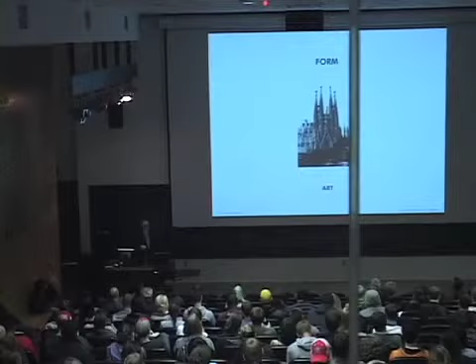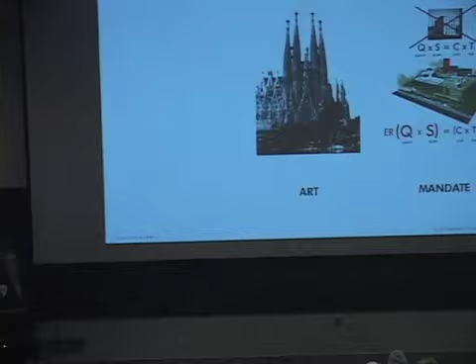And we certainly, like all of you in the room, live to make beautiful form. That's the first obligation of the architect, is to make buildings of desire on the part of our clients and those who encounter them. But increasingly today, we find that we are operating under a new mandate, and it literally is a mandate. It's one we experience daily in the course of our existence as architects. It's one our clients actually place upon us and thrust upon us, whether we want to do it or not. In our case, we openly embrace it.

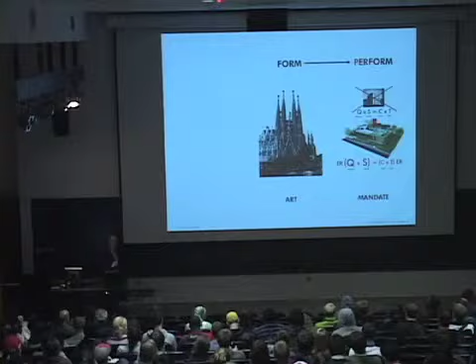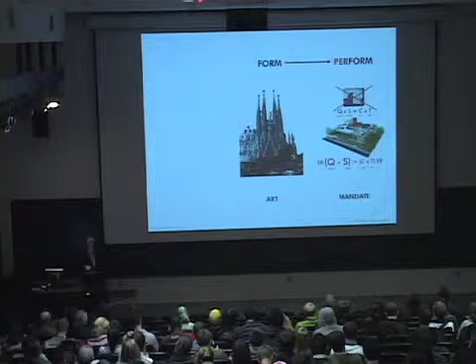Many are drawn kicking and screaming to the table on it, but it's quite simply this, that there are really two huge underlying problems in our profession today: productivity and the environment. James and I believe that they are intimately related problems and can be better solved when fused together than they can be singly. You'll see in just a moment some of the underlying reasons why these are so important.

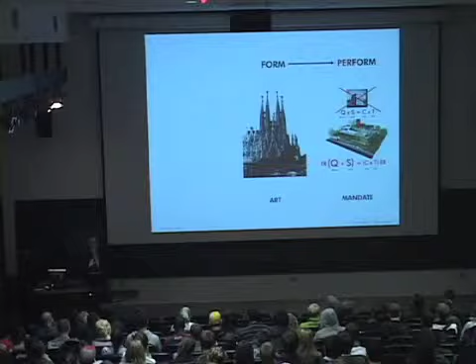But they have thrust upon us a demand for performance that goes beyond the artistic quality and appeal of our form making. And that is a reality that we are being held to today, is how we're going to improve the quality and scope of what we do in less time and for less money, and enhance the environmental and ethical performance of our buildings in terms of their management of energy and resources.

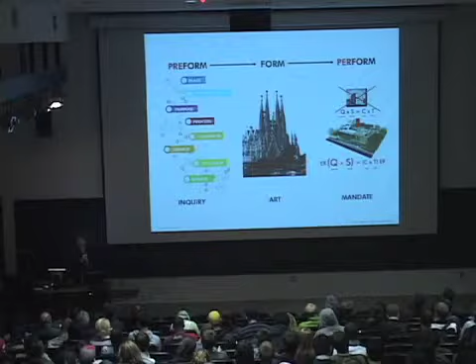To get to this mandate, we've had to restructure our firm over the last decade plus around a whole realm of inquiry, because you can't get to performance without articulating really precise and important and difficult questions that need to be answered in order to inform your design, so at the end of the day it can actually perform.

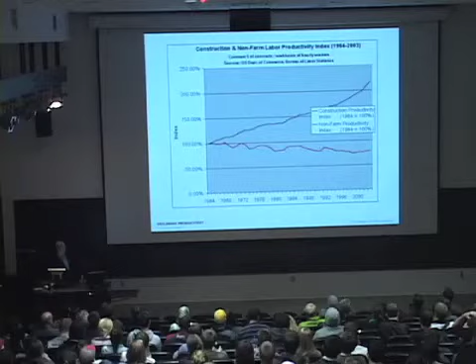At the same time, we in the construction industry and the design professions, architectural and engineering and other design professions are part of it, have actually declined by a good 20%. And that's a pretty remarkable and depressing swing. And our clients have really been telling us for a number of years, we're not going to put up with it. We're not going forward this way.

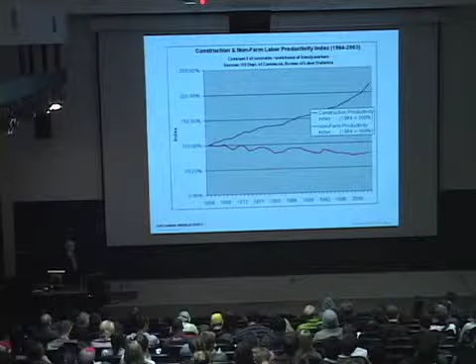And it's frankly been responsible for the decline in the quality and the craft of our buildings, because they have gotten so expensive and delivered so little that the budgets erode, and we wind up with craftless and soulless buildings almost by default because of our decision as a profession, in essence, to really not address this.

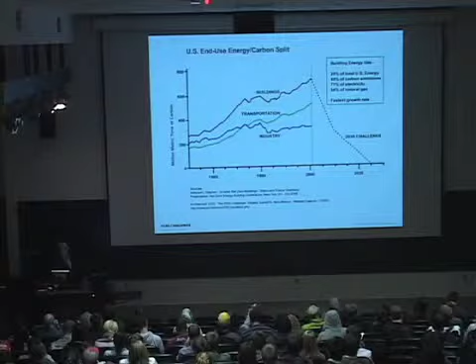And then secondly, at the same time, we're confronting an extraordinary revolution, literally, in the importance of the environment. And you can see that buildings, again, which are a huge part of the energy use of our nation and of the world at large, are again climbing in their energy use at a steeper rate than transportation and industry are. Industry's almost flattened. We're continuing to climb.

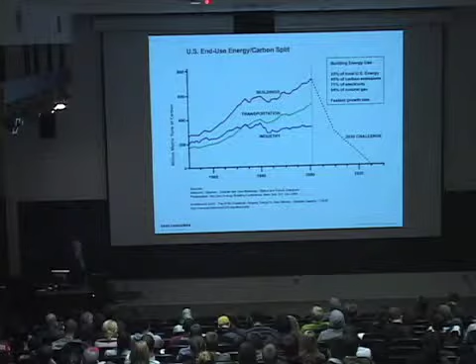Another huge challenge that, again, whether we want it or not, it's thrust upon us. There are mandates out there that government and clients are placing on us. If we don't want to meet them, we have no choice. We literally have to. So the structure of our firm really stopped being focused on planning and doing things solely, but started looking at how to monitor and learn from what we had done so we could improve upon the past and enhance our productivity and our environmental performance.

the same old thing, while the world we're trying to build in gets more complex and our productivity declines and our environmental performance declines. So the structure of our firm has at its core what we call a research kernel. It's a group of staff. There are now 7, and we have an 8th that's being added as I speak, who support everybody in the firm and drive the practice of the firm.

Some are architects with a research bias. Others are environmental scientists. Others are mechanical engineers. There's a variety of skills that they bring to the table that aren't necessarily the skills that we have. But that's what sits at the center of our practice. We research across 4 realms: processes, systems, the environment, and materials science.

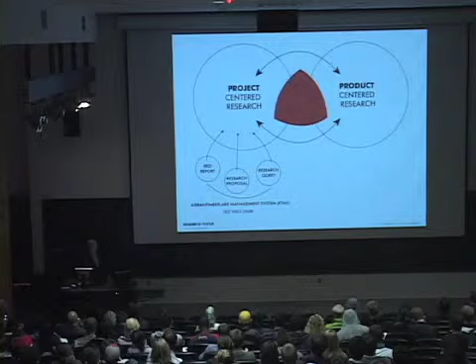Early on, when we first started the research group, one of the first tasks James and I undertook to address the productivity question and the environmental question was look at other industries that made complex things. So we toured the world, literally, and crisscrossed the U.S. The only place we went here in Ohio, I think, was Toledo to a Jeep assembly plant there. But we looked at how the aircraft, shipbuilding and automotive industries were making very complex products and, in some cases, large products as well, to see how they were doing it.

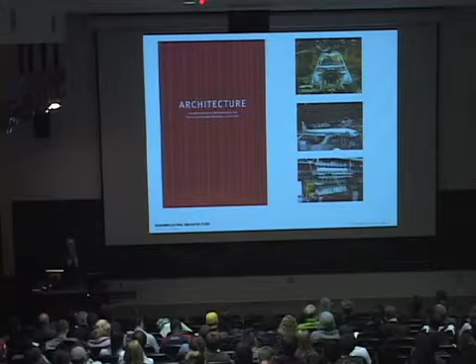And that became part and parcel of ultimately our book, Refabricating Architecture, which still drives our firm's approach to the questions of productivity and the environment. And simply put, when we went around and toured all these industries, this is what we found their new paradigm was, that they were providing more quality and scope in their products out of all proportion to the cost and time required to produce them.

And they were starting to do so in an environmentally ethical way that accounted for materials and energy use and enhanced them. And that was the paradigm that the major corporations that build these large products were operating under, but it was not the paradigm we in our industry are operating under.

So for us, the gist of it is that this is a new paradigm, and we have to add to this, of course, the obligation I began with, which is form. It's still got to be artistically extraordinary and beautiful and compelling and become an architecture of desire in the end.

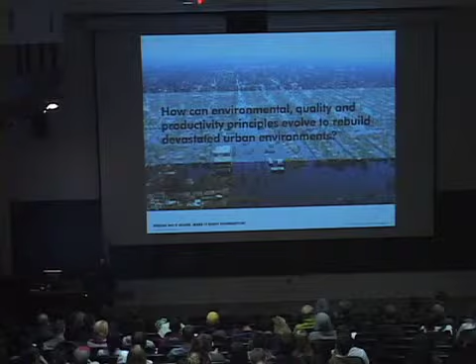So I'm going to share with you several projects in the time we have together this evening to show you how we use this realm of inquiry to form our projects. And it is our firm belief that the more we engage in and exercise and accept these constraints, the more they help us edit our buildings, make them more formally potent and simple and beautiful and elegant. So we in no way believe that these performative constraints do anything except help us make more

elementally beautiful architecture. So after Hurricane Katrina, we were given the opportunity to build what's now called the Special Number 9 House for Brad Pitt's Make It Right Foundation. And we undertook an approach here that was different than the rest of the architects that have been participating in this, and it had to do with jobs as well.

Part of the objective was to look at the productivity problem, utilize some of what we had come to learn about off-site construction strategies, and try and develop a mass customizable system of parts that could be built in New Orleans, providing jobs that after the city is rebuilt could be an export industry for the city. So we looked at common components. We looked at variable components as part of our mass customization strategy.

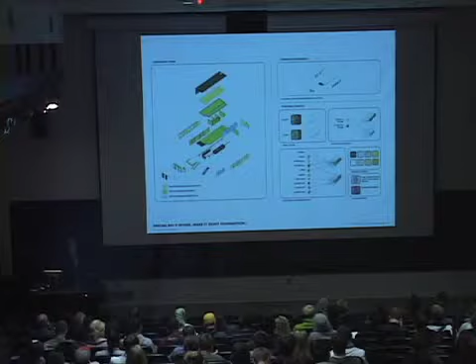There are two different roof strategies here. And then there are a series of interchangeable cartridges off of these common elements that are common to every house that an individual homeowner could select. So this was a system to design a house from a collection of parts with some capacity for both standardization of the chassis, but also mass customization of the outcome on the part of an individual homeowner.

Make It Right has been relentless in their monitoring of their performance and learning from it. And in the course of about 3 years now, they have driven the price of their first homes, which were roughly $220 to $230 a square foot, down to about $120 to $130 a square foot. They rigorously investigate building systems. There's quite a lot of off-site assembly in this that they've evolved into, and they're getting better because they monitor and learn as a client.

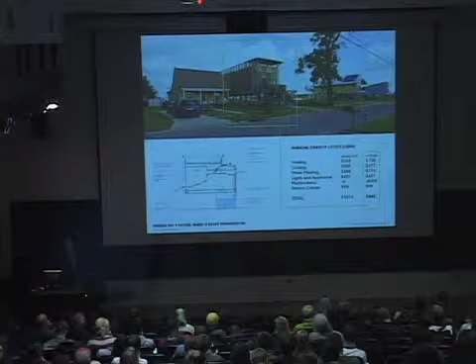At the same time that they are improving their productivity, doing more for less, their houses perform. This dwelling was designed with original simulated costs for a house of comparable size in New Orleans of about $1,670 worth of energy per year for all these systems. The actual monitored performance is $1,000 less than that. That's real money in the pocket of a homeowner who doesn't have much. It's a homeowner who actually generates more electricity than she uses, so she's selling electricity as part of her income. A real positive environmental and productivity outcome for our profession.

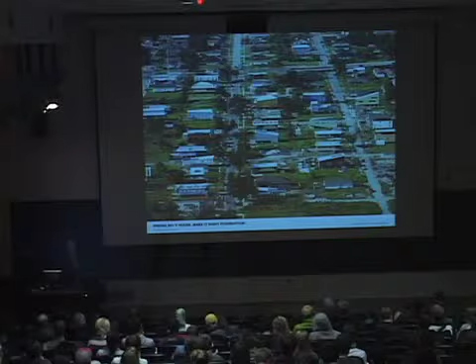It's becoming a community. The Make It Right Foundation's work in the lower 9th Ward is now the largest community of LEED Platinum homes in the U.S. And the outcome, we believe, are houses of real desire. These people really love these houses. They love being in them. They love the quality of the light in them. The owner of this particular dwelling said to us when it opened, I used to watch TV all the time. I hardly ever turn it on anymore. There's so much light in this house. I just want to go outside.

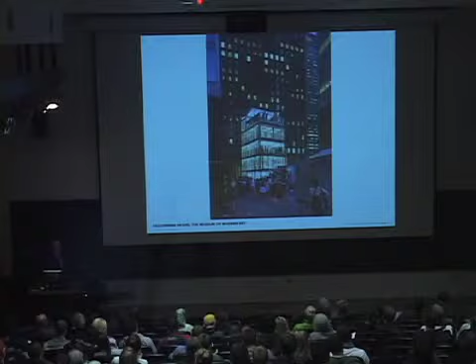A second exercise that I want to share with you this evening is the Cellophane House that we developed for the Museum of Modern Art's exhibit in 2008 that they actually put up in a lot next to the museum in New York. It was basically about prefabricated and off-site fabricated dwelling. It's called Home Delivery. This is a view of Cellophane House on opening night with Saarinen's CBS building in the background. And part of what we set out to do here was answer that question on my original slide about management of carbon in the building.

It's a very, very complex building with lots of initiatives, but I'm going to just focus on this one particular initiative with you this evening. We don't know as architects how much carbon is in our buildings. We just don't count it. Buckminster Fuller used to always marvel at the fact that we didn't know how much our buildings weigh. It's far more marvelous that we don't know how much carbon is in them.

And we don't, as a profession, again, ethically assume the responsibility for managing carbon because we don't even have a clue about how much we're designing with when we're designing. So we're designing a lot of products and methods to manage that. And it's critically important for this simple reason.

We can focus all we want on operational energy that goes into our building, but when we put a building up, in the case of the two houses I just showed you, there's enough embodied energy already in those houses to equal 40 years worth of operational energy. So we're basically leaving a huge portion of the total energy on the table, literally. And it's frankly unethical for our profession to go forward thinking we cannot understand what we're doing when we're designing a building in terms of carbon in the materials we're using.

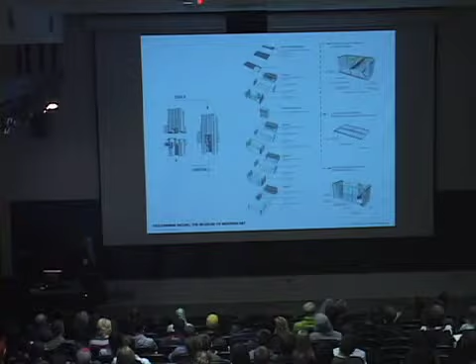So this is a dwelling that had to go up in just a couple of weeks. So it has three components to it, a stair, and these are more modular. It has an internal floor plate in the center of the building, and it has the front wall of the house. And these are the pieces and how they stack from the bottom to the top. And this is the fundamental architecture of the building. It's this joint, very, very elegant joint that was developed to be quick coupled together to enable this fast couple of week-long construction process, and it had to be uncoupled equally swiftly.

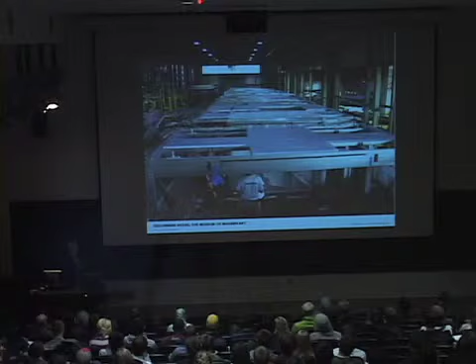So here it is being put together in a plant in Lebanon, New Jersey, Kullman Industries, Kullman Buildings Corp. And here it is going up. What you see here was a week's worth of work, and we had a little more than 2 to finish off the entire dwelling. So it was all basically craned into position. It similarly had to come down in a similarly swift time at the end of the day.

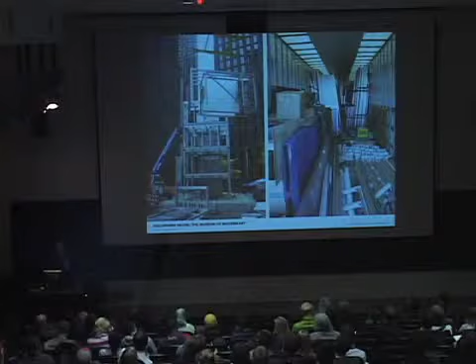So on the left, you can see the house being disassembled, the joints that stack together and join, unstack, and allow the dwelling to be taken apart. And those modules were laid on the ground, then disassembled. Every single part is labeled with a code on it, and they were stacked into trucks and taken away. So it was designed for disassembly. Now, why is this important?

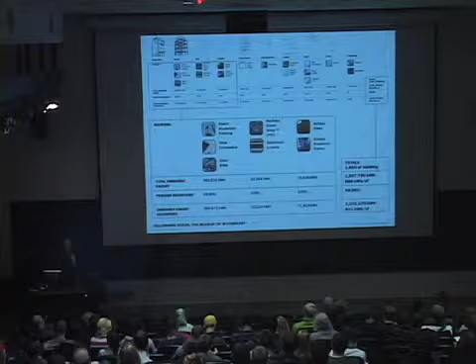We believe in our practice that it's an ethical responsibility to start to look at the life cycle of a building and design for the long-term management of the energy that went into the building so we don't have to pulverize it. Recycling only reclaims a small portion of our buildings. Designing them for disassembly can reclaim more. The products can be used in other industries. The scaffolding on Cellophane House, we've sold some of the extra scaffolding to industry that uses it for machine works and machine enclosures.

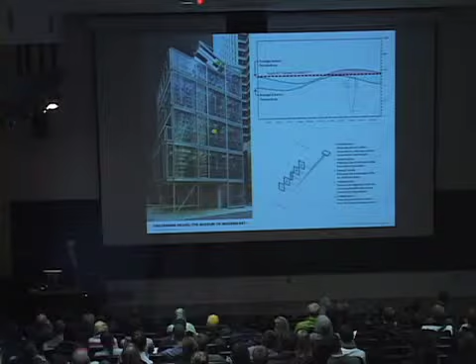It's got integrated shading films that let in the type of light we do want and keep out the radiant wavelengths that we don't want. It has integrated photovoltaics on the skin of it to generate the energy to use the building. And it's part of an ongoing exploration in our firm of a wall cladding product we call SmartWrap that began in 2003 in a Cooper Hewitt design exhibition.

And again, the outcome of these constraints is beauty, we think, and objects that glow, places that people want to go into. When they came onto the site at the museum, this was the object people gravitated toward. So these constraints don't restrain us. They actually provoke us forward in terms of the desire and the beauty of the buildings. It comes out of the constraints. The more constraints we have, the better. The more we have to work against, the more artful our buildings are going to be.

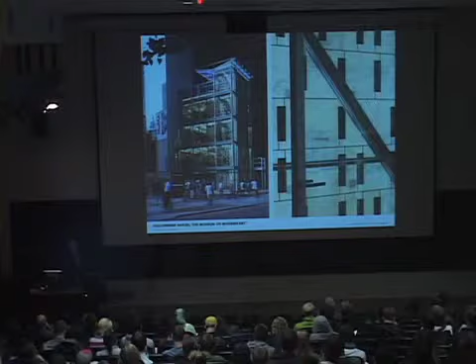Shifting gears from houses, and by the way, on the houses, we pretty much only do houses when we can make entire experiments out of them in terms of how we change and address these productivity and environmental problems.

So the larger buildings are more focused in that regard, but we are working in institutional building contexts to try and use some of the same principles as well. I'm going to share three buildings with you that have just been completed, so they're not published. They're not in the book that Mike held up this evening because they've just been finished this fall.

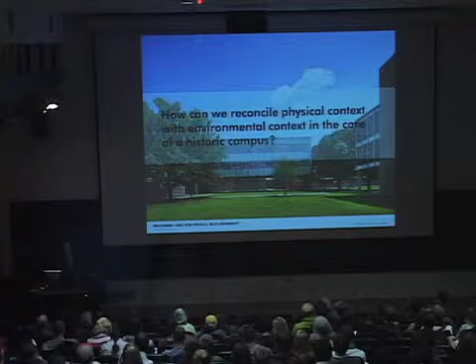The first is a new physics building at Rice. For those of you that know the campus, it's a pretty extraordinary Ralph Adams Cram designed campus. The core of the campus, the main axis, is here with a lot of the Cram buildings, the old architecture school lining that edge. The site for this building is in the engineering quadrangle. It sits squarely in the middle of that quadrangle amongst a series of largely 1960s era, but somewhat earlier era buildings, and a couple of postmodern buildings like this one in here. So very much hemmed in within a tight historic context.

They originally thought they wanted to move the building out to another sector of the campus, the way most research labs are moved today, but we were able to convince them to stay in the core. And the plan is quite simple. It's a double bar building. There's a bar of laboratory spaces here and a bar of office spaces above this landscape here. So the ground plane out here is open with a building above. And there's a passageway through the middle this way and another passageway bifurcating the building here.

It sits, we think, really well within the aesthetic context of the campus, but it's fundamentally performative at the same time. We do lots and lots of work over the specifics of orientation, down to horizontally rotated and vertically rotated building volumes, to completely understand, before we start designing, the environmental performance of a building, how much energy is falling on it. We model them across time throughout the year to understand that, look at the totalities of it, and then start to engage in designs for which that is part of generating the form of the building,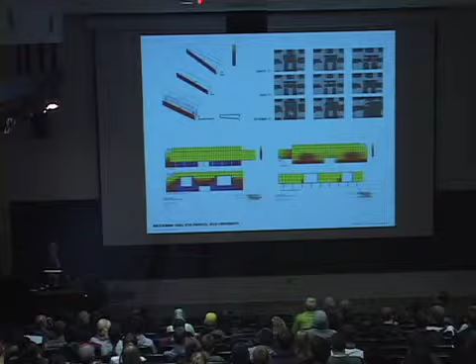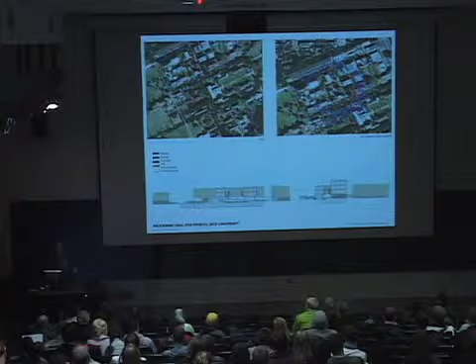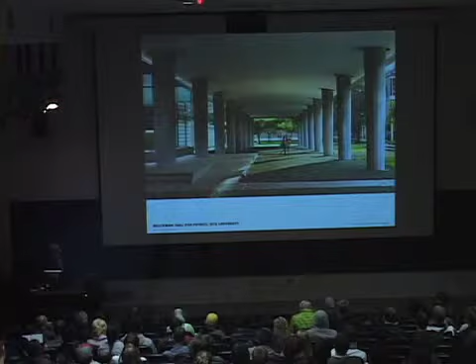So there was a detailed, very expansive survey of the site, including some wind modeling testing, some physical modeling on the site, as well as computer modeling. And again, all the design ideas were tested against those models for performance. And the outcome includes this shaded undercover area along the front flank of the building with the office wing above it, and with an open light well in the middle that provides ample and abundant daylight for all the offices in the building that face out into this well.

And the well is a device that shades direct solar penetration into these spaces and allows for that degree of daylight to penetrate into the core of this very large building. Use of a water feature to help provide some cooling in the outdoor space here. And all of it very much consistent with the context in which it occurs. You can see some of these engineering buildings in the background from the 60s. This building sits well within the campus. The main entry and stair is located on the cross passage of the building. And again, this passage is sited for wind penetration through an adjoining courtyard complex. So very much part of our design thinking throughout is constant testing of the building.

So basically the idea was to take the laboratory wing that did not want nor could it use much daylight and was a much larger volume, place it to the south so it screened direct solar penetration and allowed mostly penetration of light into this interior courtyard. And then on the north flank, we were able to open all the offices of the building up. So it's just good, sensible design based on a knowledge of the actual micro-performance of a site so that we don't create problems that require us to use extra energy to resolve the problems through machinery. Really, really simple, fundamental underlying set of premises, very, very difficult to actually put into play, though.

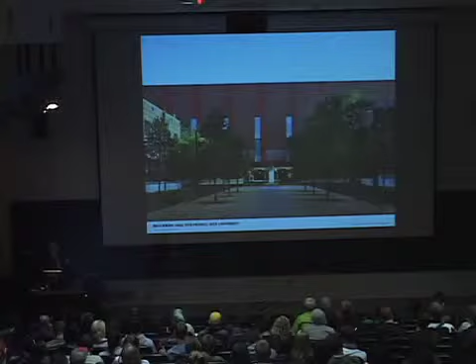Pretty remarkable for a building that cannot have natural ventilation in it. So this is the screen that more or less sets up the whole promenade and procession from the core of the campus out to the building here.

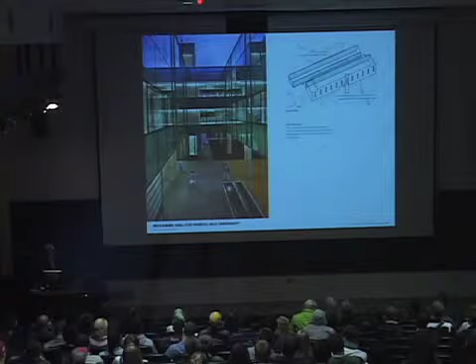And you penetrate through into the interior, and this is where we've been able to really introduce the daylighting in these spaces, ringed by offices with classrooms and seminar rooms and meeting spaces in the connecting links in between these two wings, and a view of the complex as a whole with the classroom wing here, also lined with classrooms on the north facade of the main laboratory block here.

At the same time, organizationally, we always ask social questions and have social inquiries about how the building might best be programmed to bring people together and engender collaboration. And in this case, it came together with environmental concerns, as it always should. All of the laboratories are over here across the top flank of the building, and they are able to be entirely flexible, which I'll show you in a moment, because they have similar mechanical requirements.

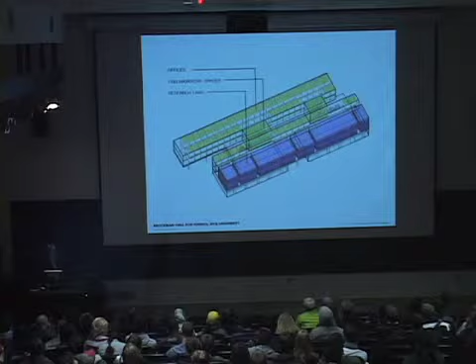So this is a completely different building in a way, with different mechanical systems designed for long-term flexibility of laboratory use. Similarly, this is an office block over here, designed with different mechanical needs altogether, different environmental needs altogether, and also designed for complete flexibility over time. And they're interlocked by these common spaces, these collaborative spaces in the middle that draw people from both sides, from the office and labs out into these collaborative spaces.

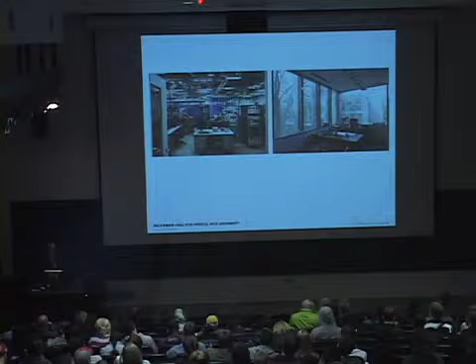So this is pretty typical of what the labs in the building look like, and they're changing daily. So it was an armature and an infrastructure to allow change. Physicists build all the time. They're rebuilding their environments every day. So that module allows them to do whatever they need and want to do in it. The offices will change less regularly, but they can easily be combined into suites. And so this building is designed for long-term flexibility that minimizes new construction, new materials, new embodied energy in the building, and optimizes the capacity of those that use the building to make environments that they need to be productive.

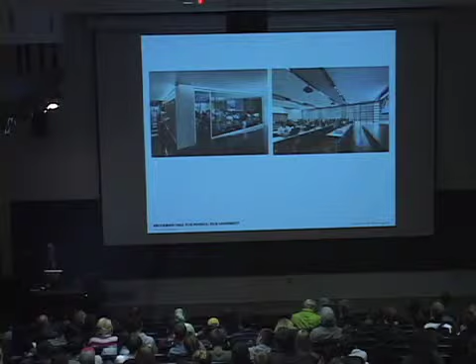And then lastly, these are some of the spaces in the center of the building that are these collective, connecting and collaborative spaces. Again, it's a whole set of constraints that if you go to work on them and listen to them and don't fight them but accept them, really in the end helps us edit and make our buildings more elemental and simple and direct. And out of that, we think, you've got a much better chance of deriving something that's beautiful because it's elemental.

The biggest problem, by the way, I find with my students at Penn, I don't know if it's true here, is editing. The fear is always making something simple. When there's so much complexity inherent in the details of a building, it's never something to be feared. It's something to be embraced. But it's just really difficult. It takes a long, long time as an architect to understand the importance of editing and using constraints to edit. We consider cost a very potent and wonderful editing constraint that saved us from doing innumerable bad details and bad designs over the years.

So this building is a tiny little project, only about an $8.5 million conversion of a gym into a Quaker meeting and arts center at Sidwell Friends School in Washington, D.C. It's a Quaker prep school where the Obama kids are enrolled now. Long been a favorite of Washington Democrats. The buildings on this campus were frankly terrible. You can see this particular building on the right. This is a

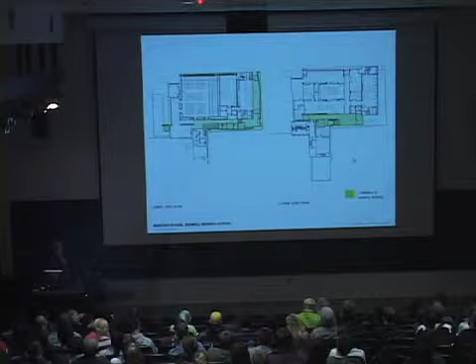I'm going to first deal with the urban design of it. This small portico out front, for once, starts to give this building an address to the principal outdoor space on the campus, the principal gathering space called Lubar Court. It shields a little tiny pocket court that is a garden here from that outdoor space. This garden becomes a little moment of calm before you enter the Quaker meeting.

I live in Philadelphia. Most Quaker meetings have gardens that you enter through before you go into the meeting, intended to put you in the right frame of mind to experience the meeting itself, and that's what that little garden does. There is a circulation path then that's carved right alongside the old gym. This is the old gym through this door, but you're looking into the new meeting hall, which I'll come back to in a moment.

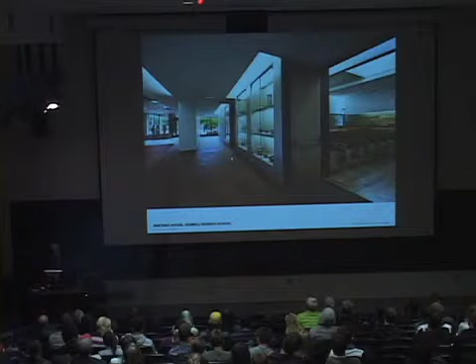And this passage cuts right through, and all we did was infill a tiny little space here in between another building and the gym with a new stair and a new passageway beyond the stair that allows for connection from the upper court here through and into all the spaces in the new building, down to the lower level and through to the campus to the new middle school that we built 4 or 5 years ago for them, and then down to their new underground gymnasium and out to 37th Street on the back.

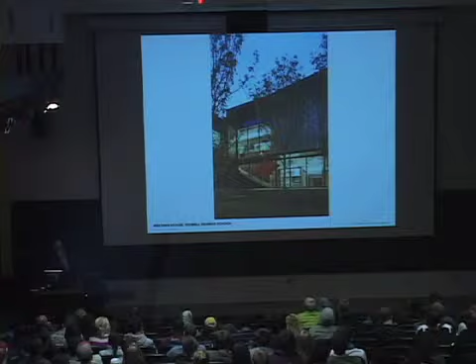Very simple, insightful insertion in the building that profoundly transforms the whole sense of the campus, the address of the campus, the connectivity between buildings, and the conversation or dialogue between buildings. And it's a beautiful moment in a campus that doesn't have a lot of beauty to it. We've been trying to add beauty to it over a period of years.

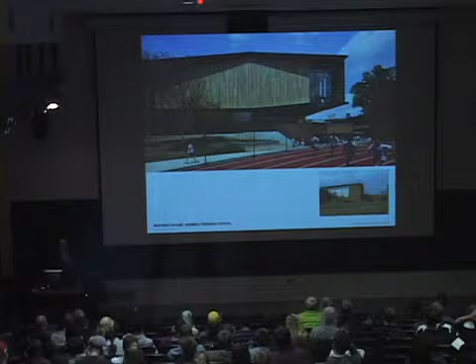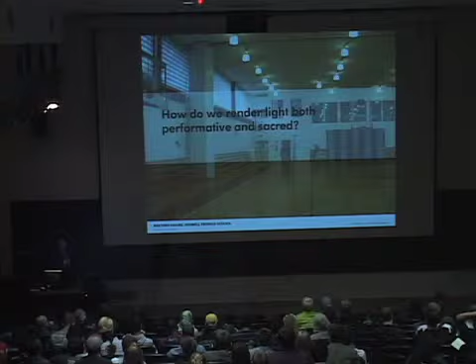You can see that little linear lamination of an addition here, culminating in a big bay window, projecting out above the lower level of the addition here. And it's a simple but dramatic transformation of the way the building's perceived and the way everybody moves about that campus and their sense of actually having a campus for the first time. All as a byproduct to the fundamental program, which was to transform this gym into a new Quaker meeting. And that was a tall order, again, that there was tremendous skepticism about.

And we were guided by a really simple elemental diagram from the outset. The essence of a Quaker meeting is just silence and light. That's it. Just shut up, sit in a chair, and think. And if you really have something to say, get up and say it. If you don't, just sit and think and listen. It's fundamentally, architecturally, about these two things, about silence and light.

To establish the silence and light, we developed a thick wall as a threshold in between them that contains all the systems of the building, so they can be really low velocity systems and not create any sound. There's a layer of structure that wraps around that and a layer of circulation that you can see here.

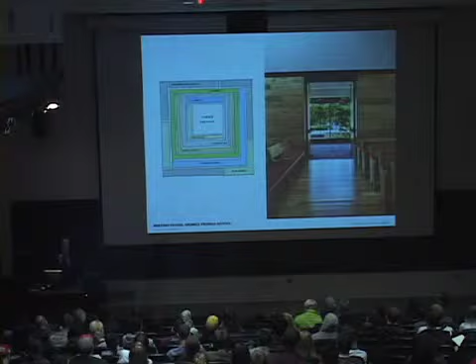In this diagram, by the way, right now, you're looking from here out this way, through the threshold and structure, through the circulation here, out beyond that circulation to the little garden that you walk through at the outset, and then to the main plaza of the campus beyond. So that was just a simple diagram. We thought about it at the start of the project, and that's what we did. And this is the outcome.

It's a really simple room that focuses light in the center of the meeting. The meetings today are designed in central plan form typically, but there is no one at the center. There is an elder of sorts, in this case the headmaster of the school right there. But the idea was simple.

Basically layer up the volume of the building with some new planes that you can see rotating about the center of the space to establish this opening at the center that provides a mysterious sense of light down into the core of the meeting and becomes the focus. It's everybody's focus in the room. Really, really simple, elemental thing.

We screened out the old clerestory walls of the building, but allowed light through them. This is daylight coming through onto the wood wall below, and allowed them to open at the corner to get slivers of daylight and view into the building.

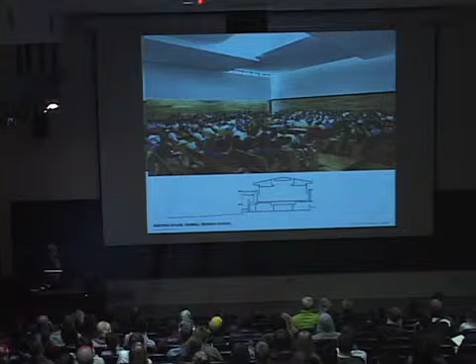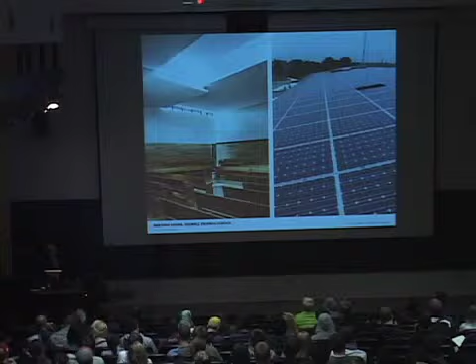And the entire roof of it is clad with photovoltaics. This is a LEED platinum building for $8.5 million that generates huge amounts of energy and uses very little. So we made use of light in two fundamental ways. The outer layer of the building is generating energy, and the inner layer of the building just below that photovoltaic roof is architecturally organizing the daylight to provide the setting that allows light to penetrate right down into the core of the building. Just simple, elemental stuff.

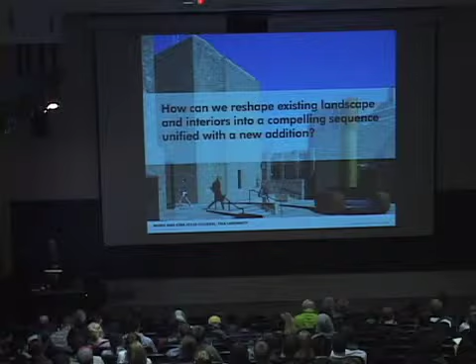The third of these projects I want to share with you is a design that adds to and renovates Eero Saarinen's 1960 Morse and Stiles colleges at Yale. They're buildings that needed a lot of love. Under budgeted at the time. Cesar Pelli was the project architect for it. He said the budget was $16 a foot, which even in 1960 was not much. But it was a very hard building without a lot of accommodation to it.

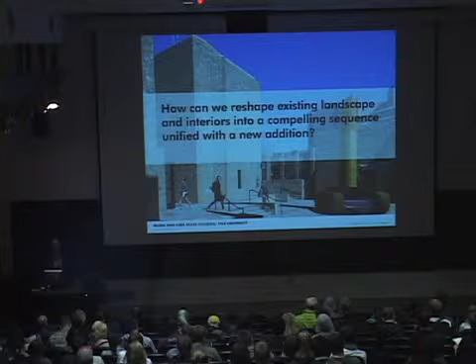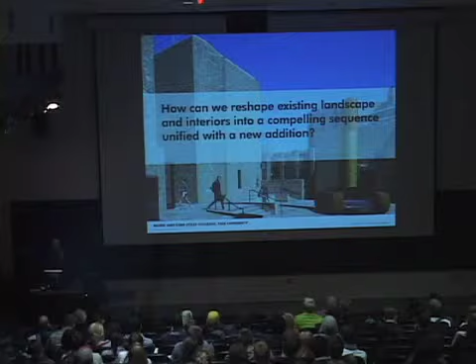So, you know, the basic idea here that came about with the addition and the renewal and renovation of it was to fuse the exterior of the building, which was its strong suit, its courtyards, through into the interiors and develop a kind of compelling sequence from the existing court through the existing building right down into the addition below grade. And the program called for a relatively large 30,000 square foot addition below grade here out in what is called the Crescent Courtyard, this beautiful crescent-shaped court facing the university's gymnasium.

And our work is highlighted by this dashed line here. And we added a lot of new construction below grade for 2 stories going down below grade. A massive, almost lava-like pouring through the building and underneath the building of concrete out into this courtyard. And we used light wells. Most of the Yale buildings have wells around their moats, around their edges. And we use that contextual motif to allow light to penetrate down into the addition below.

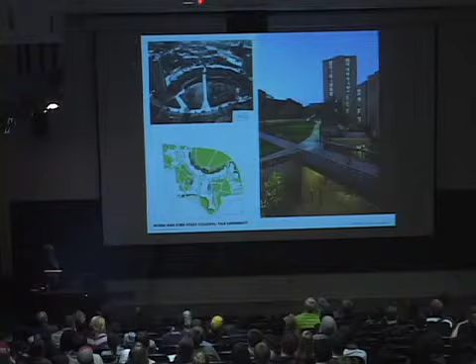So very simple idea that begins in the courtyard here. We rebuilt and redesigned the courtyard to flatten it out so it could be used for play. Added a new water feature. All of the water is collected that falls on the site and used in this feature. Added a dining terrace and deck here outside the dining hall to extend the dining hall to the outside.

These few things have made this actually the college that everybody's trying to transfer into at Yale now, as opposed to the one that used to draw students when they would arrive on campus weeping to their parents about what they'd gotten into. So it's this kind of a transformation of it, bringing things from the inside out and starting to introduce indoor and outdoor connections that didn't exist and don't exist elsewhere at Yale. That's really been transformative.

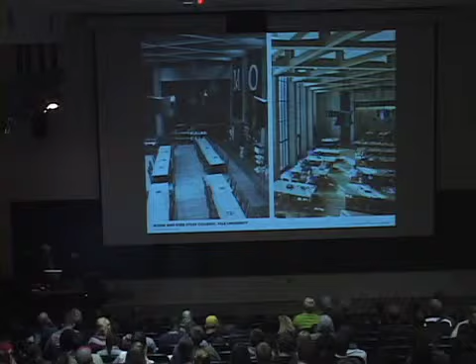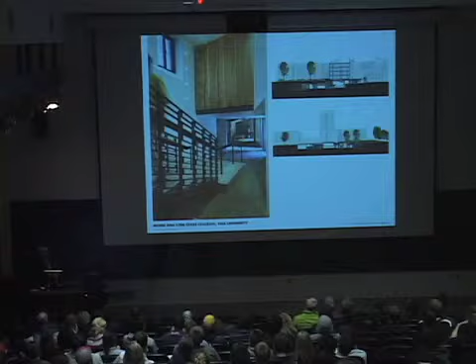But you come down through that courtyard, pass through into a lobby, and on one side is the dining hall. On the other side is the commons, which in Saarinen's original design was thought of as a basement rathskeller, and we've converted it through new skylights here into a light-filled common room. And you then pass through the lobby in between those two rooms, cascade down this stair that you can kind of see up here, into the new addition below, which you can see beyond.

And that addition is centered around a courtyard. So there are two courtyards here. This is Stiles College, this is Morse College. This is the Morse Court, this is the Stiles Court. This is the dining terrace and water feature that I just showed you in Stiles. Morse has a similar one. You've come through the dining halls here, the common rooms here, and then you go down this stair, and you're looking now at the perimeter of a sunken light well, a subterranean kind of grotto in this portion of the building, with all the spaces arrayed about it.

The planning idea here was simple. Saarinen made every room in Morse and Stiles irregular, and all the passages are regular. One of the things we heard was about the lack of usability in portions of those rooms, so we did the opposite. We made all the rooms regular and rectilinear, and all the passages are irregular. Even the ceilings in the passages slope. It's all board-formed concrete of the same tonality as the original building.

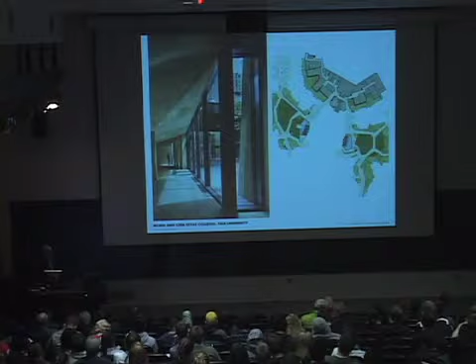So here you're looking at this light well at the bottom here that organizes all the spaces around the perimeter. Another view on the other side looking up the stair into Morse College about this light well. And a view out into the courtyard. We had to literally build a building underneath the building to make that happen.

So these giant blocks of concrete that appear to be sculptural are also part of the underpinning for the new addition. And we simply organized and formed them and developed patches and joints between new materials and old materials to basically render this fusion of new and old artful. But literally, the way to think about this is it's an addition underneath a building, literally.

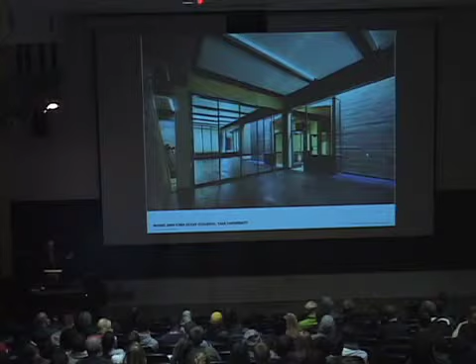We've sought a way to bring daylight into the buildings in ways that's memorable and that people respond to and never forget. We've looked at and worked on the articulation of these battered board-formed concrete walls that you can see here. And the dialogue between those walls and the infill of a steel structural system for the decking of the building, we think is a pretty remarkable and rich dialogue of those two materials and conversations between them.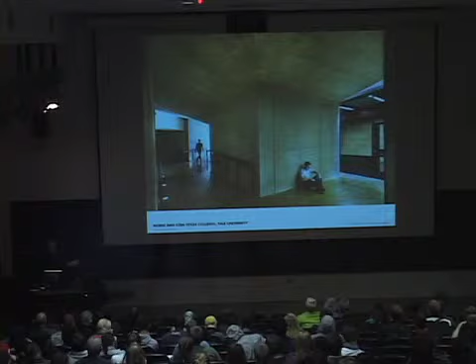This is literally a hole through the addition. It's a pit through the addition that has a huge tree in it above. It's difficult to grow large trees on additions. So we basically brought the earth right through the building, so we could found a tree that could get huge and take itself down to the ground. But you can almost feel the roots of the tree literally just projecting themselves through the mass of the building and finding solid earth below.

And then lastly, I'm going to end with two projects. The last three buildings I've shown you are things, as I said, that we just finished this fall. The physics building at Rice was just published in Architecture, and the Morse and Stiles project will be in Record in November. These are two projects that are underway now, and we've just finished design documents and bidding on this.

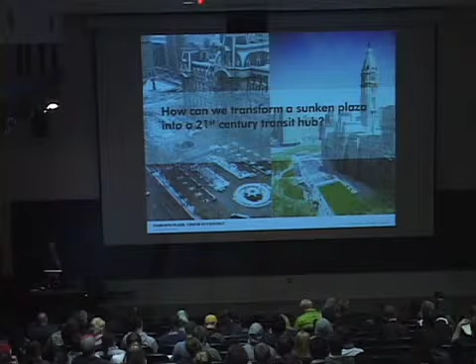But the fundamental question here was the transformation of a sunken plaza that never worked for the city into a 21st century transit hub and a functioning urban plaza above it. And it's right at the base of City Hall in Philadelphia. This is City Hall, and you can see our new plaza design here. We're working with Olin as landscape architects on this project.

Enormously complex moment in our city. The two main east-west and north-south subway lines cross above and below each other here. The subway surface lines, the trolley lines throughout Philadelphia, come together with those two lines over here. The regional rail service for the whole region is right here and connects across. And there's literally hundreds of years of old buildings and foundations under it.

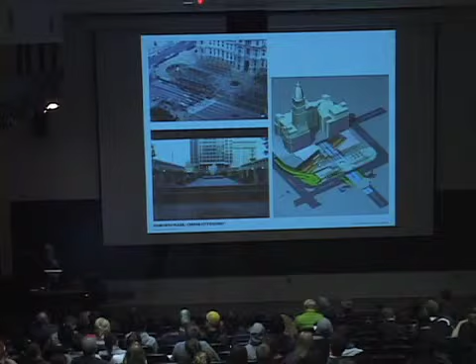But this is fundamentally the area that we're charged with bringing back up to grade again, making it a functioning part of the city as opposed to a sunken plaza, and then turn that area into a new transit hub at this intersection of the city. The plan is very simple. There's greenery around the perimeter to separate it a little bit, since traffic wraps all the way around City Hall, which is right at the main crossing of our two major streets in Philadelphia.

In the center, there is a scrim-type water fountain that can be shut off and just used as plaza places and meeting places. Right now, this is the site of Philadelphia's demonstration that's going on in our city, with people camping in that sunken plaza. In the future, they'll be able to camp on grade here. There's a lawn platform here and a cafe over there. Very simple design, along with two entrances down to the transit hub below. And I'm going to come back to these two glass pavilions in a moment.

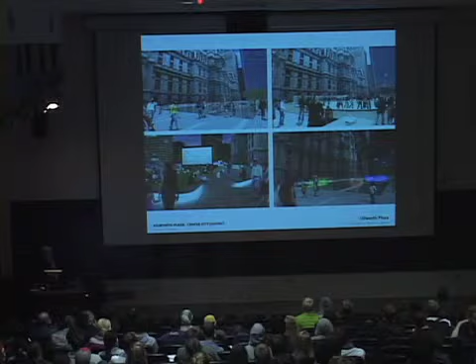A huge number of programming opportunities come to the fore on this plaza. Most of the year that's not winter, it'll be a scrim fountain that people can play in. In the winter, it'll be an ice skating rink. The lawn panel can be used for films. And there's also an artist, Janet Echelman, who's developed a permanent art installation for this scrim panel as well.

And very simply, the major part of our role was the transit hub and the entries to it. And what we sought out here was a really simple, elegant gesture. It's just a curved arc, two glass planes, really one portion of a continuous arc, that penetrate from above ground down into the new transit hub below. It is formally fused to City Hall. The top of the west elevation is the center of the arc of these two plazas.

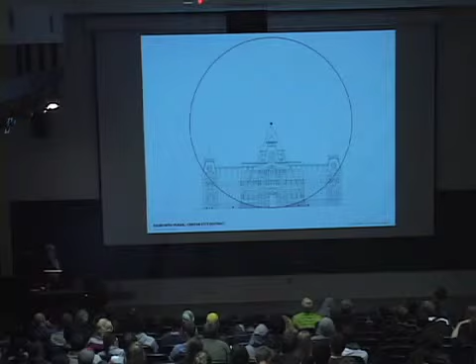And in a way, one way to think about the monumentality of this building is that this is the support for the monumentality of the building. And we can never compete with the masonry of this building. This is the largest piece of entirely masonry construction in the world. But we can compete with it in this way. This is the masonry structure of City Hall.

And it was simply developing a glass system of these two glass arcs that has nothing in it but glue and glass. That's it. So it's a bearing wall and bearing glass roof system, and it's one of the largest ever attempted in the world on this scale. So, but it's a lot like City Hall.

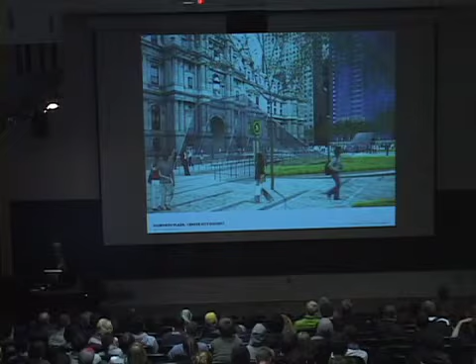It's extreme. One is the largest masonry building. This is a real tour de force of very elemental glass engineering. And you can see the result here. We think it sets up and enhances the monumentality of Philadelphia and of City Hall, when everyone thought that they were going to have the opposite outcome of that.

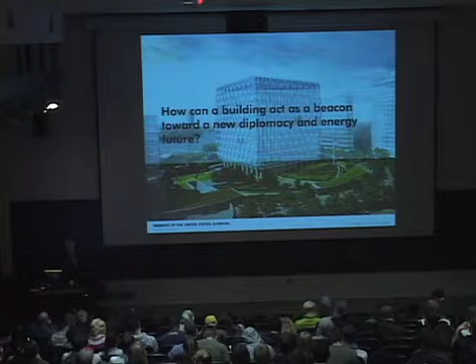And then lastly, a few images on some design work that we're undertaking now for the new United States Embassy in London. It was a competition we won about a year and a half ago, and we're in design development on it now. We had a lot of questions for this, but the one I'm going to share with you tonight is the transformation of an American embassy as they have come to be known in the early part of this century into what we think of as a beacon for both diplomacy and for the environment, for our energy futures.

And that is not what we have come to think of as our embassies. Since some of the attacks on our embassies in Africa, now more than about 10 years ago, our embassies have been hardened. They're basically concrete bunkers. So our objective was to basically invert the entire way that an embassy is designed, to make it a transparent, prismatic beacon that you can read any way you want. But we thought that that would be a more compelling image of what we might aspire to, as opposed to the bunkers out there.

But at the same time, an environmentally responsive building. The site is just off the Thames, on the south side of the Thames, between Vauxhall and Battersea. It's about 5 acres, with the embassy sitting in the middle of its grounds here. It is really, again, a really simple idea. And the other 3 competitors had significantly more complex ideas. And we think this resonated because of the simplicity. It's a cube. All of the proportions in it are based on the golden section.

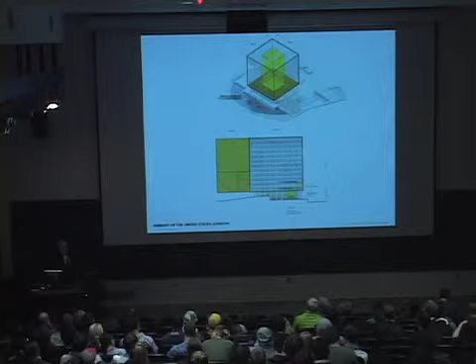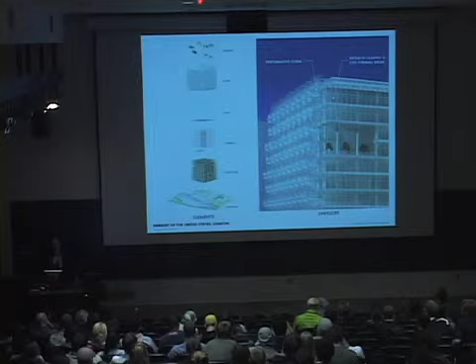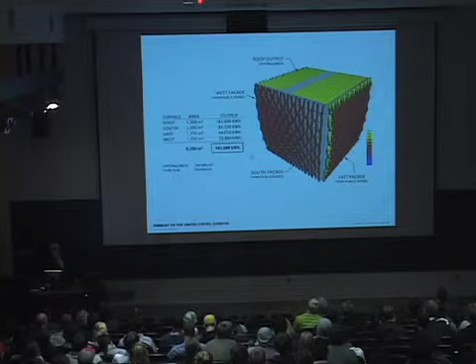It is developed with a performative scrim, a second wall. You can see the structure coming up from the site here and the building systems, and the inner building envelope, which is a blast-resistive glazing system, and the outer envelope that is a performative system that screens unwanted sun from the interior, reflects daylit wavelengths that we do want into the interior, cuts down on glare, and generates energy for the building. All facades of the building, the roof and the walls, have this performative scrim on it. It generates about 350,000 kilowatt hours of energy per year.

The objective of this building that we set forth in the competition, and that we're still to this day working toward and trying to realize, is basically carbon neutrality, that we would ultimately, through a series of efforts, beginning with a high-performance building envelope in the first place, and with enough renewable energy production that we could actually sell it to the heating grid in London, as well as to the electrical grid, would allow us to go below carbon neutrality and get to true carbon neutrality, and actually pay over time for all of the embodied energy in the building as well.

And then just 3 images from the competition scheme. This is a walk up the passage toward the entry to the consular section of the embassy, and it gives you a sense of the detail of how this prismatic form is created using stress skin ETFE envelopes with fritting, solar shading films, and photovoltaics integrated into them to really enhance the performance of the building envelope.

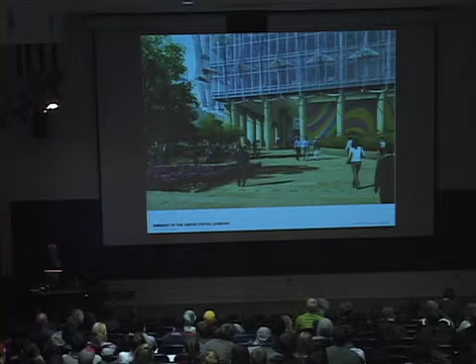This is the view from Nine Elms Lane along the bank of the River Thames. And it's transformative in terms of new embassy making in the US. Instead of seeing a hardened bunker at the base of it, you see into the interior of it. Instead of seeing portholes for windows, the entire building is this transformative, transparent cube.

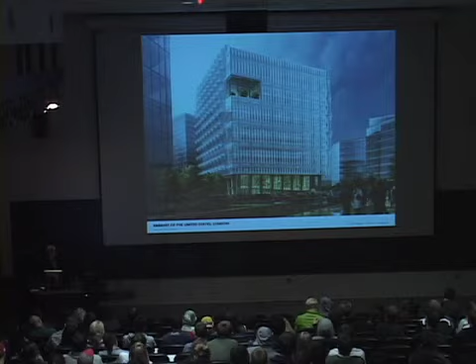And it sits well in London, in between Battersea Power Station here and the Covent Garden Flower Market here, along the river, as what we would hope would become a transformative beacon of our democracy and our presence in the UK, that speaks in symbolic terms in ways we would like to be spoken of and like to be thought of, but also at the same time becomes a responsible energy citizen of the world, and moves us into a position of leadership in a field of environmental design where we have been the international laggard in many regards. So that's it.